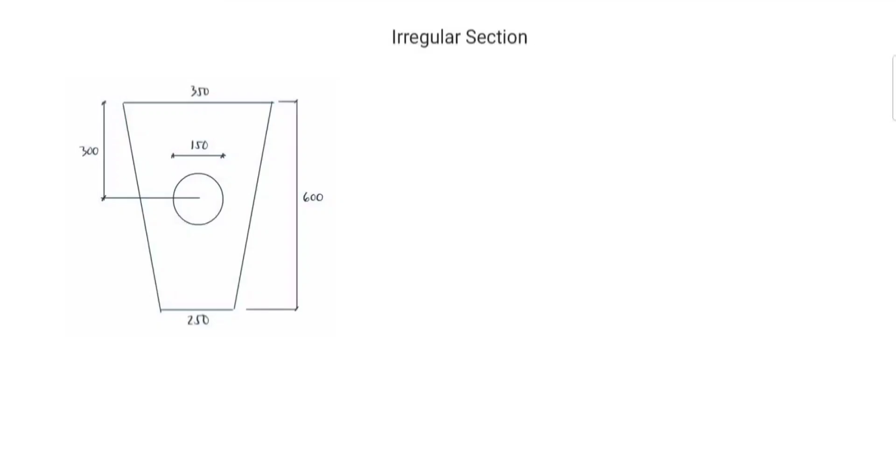Moment of inertia of an area. The example is an irregular section.

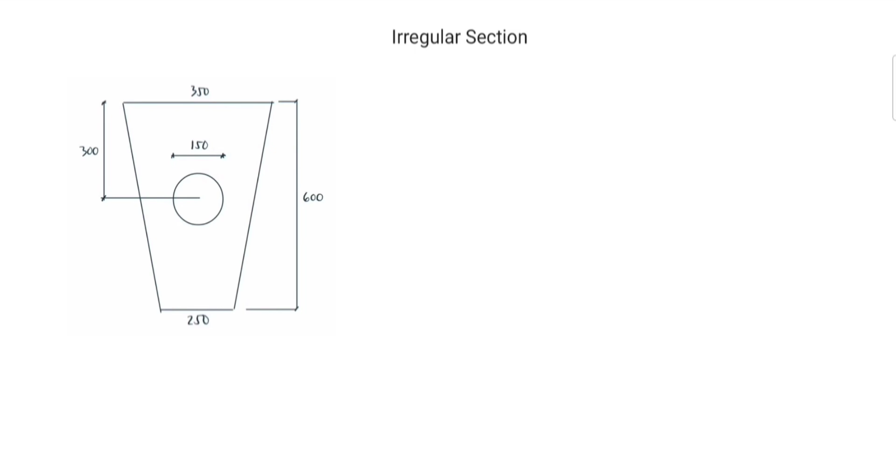Ang cross-section ay trapezoidal section na mayroong circular hole. Ang una muna natin gagawin is find the area. To find the area, i-divide natin yung cross-section into parts.

Yung trapezoid ay dinivide into two triangles. So the upper triangle is first part, the lower triangle is the second part, and yung circle is the third part.

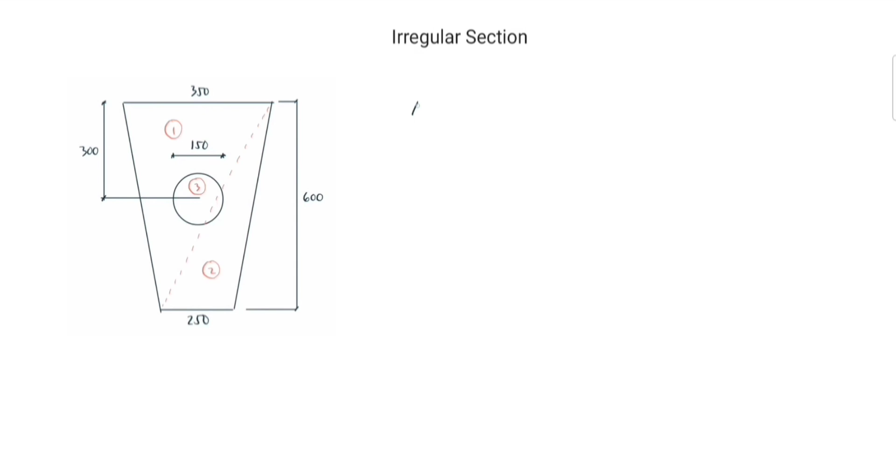Area 1 is equal to 1/2. The base is 350. The height is 600. Equal to 105,000.

Area 2 is equal to 1/2. The base is 250. The height is 600. Equal to 75,000.

Area 3 is equal to pi times the radius is 75 and then square. Equal to 5,625 pi.

So the area of the cross section is equal to area 1 plus area 2 minus area 3. Equal to 162,328.5413.

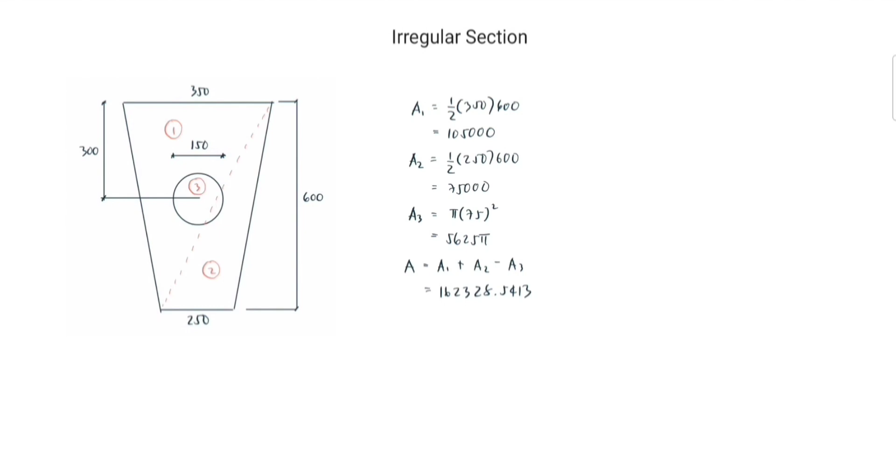Next step is solve for the centroid. Say ito yung centroid and yung distance niya from the bottom is YB. To solve for YB, we take moment of area about the bottom.

The moment of the total area about the bottom is 162,328.54 YB equal to the moment of the component areas about the bottom. For area 1, the moment of area is 105,000 times the distance of its centroid from the bottom equal to 2/3 of 600.

Plus, for area 2, the moment of area is 75,000 times the distance of its centroid from the bottom equal to 1/3 of 600. Then minus, para sa third part, the moment of area is 5,625 pi times the distance of its centroid from the bottom equal to 300.

So YB is equal to 318.4810384.

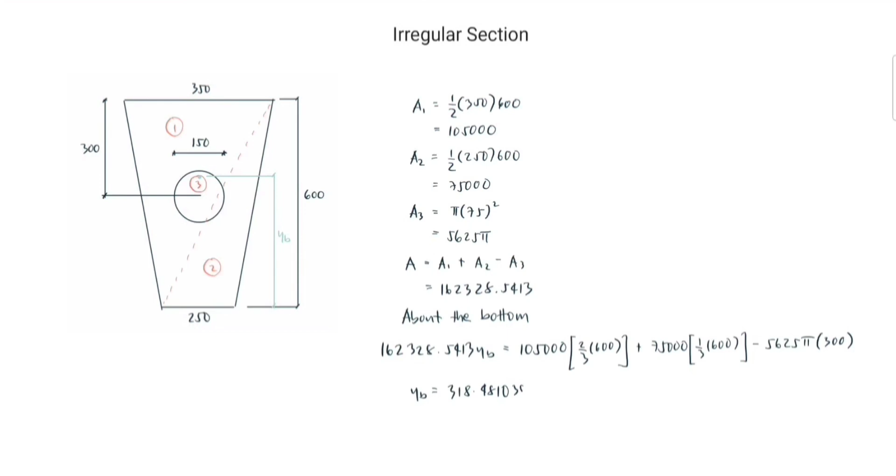Next step is solve for the moment of inertia about the centroid. Kung gagawa tayo ng cutting plane passing through the centroidal axis, medyo magiging mahirap ang calculation ng moment of inertia about this axis. So ang gagawin natin, maghahanap tayo ng axis kung saan madaling mag-solve ng moment of inertia.

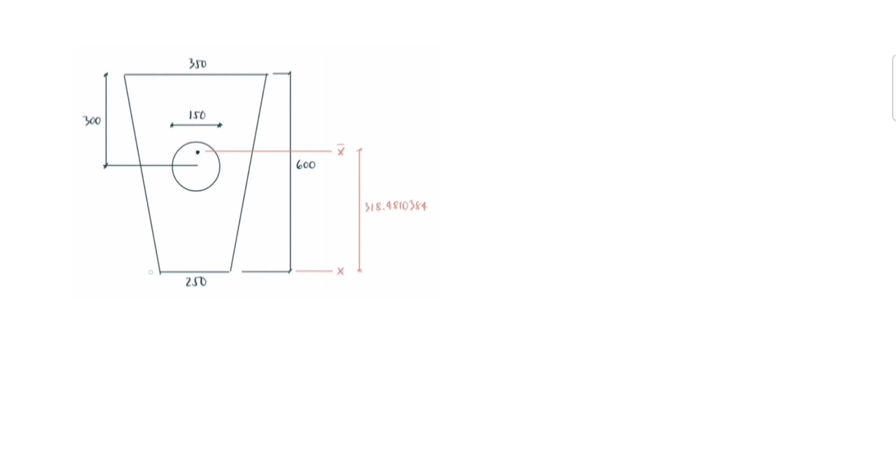Sa problem na to, madaling mag-solve ng moment of inertia about the bottom at tawagin natin siyang x-axis. So the moment of inertia of the cross-section about the x-axis is equal to,

para sa first part, the moment of inertia of the triangle about the x-axis, which is the tip, is equal to 1/4 times the base is 350 times the height is 600, then cube, plus, para naman sa second part, the

moment of inertia of the triangle about the x-axis, which is the base, is equal to 1/12 times the base is 250 times the height is 600, then cube.

Then para sa third part is minus the inertia of the circle about the x-axis. The inertia of the circle about its centroidal axis is pi, radius is 75 raised to 4/4, and then i-transfer papunta sa x-axis. So plus area distance square.

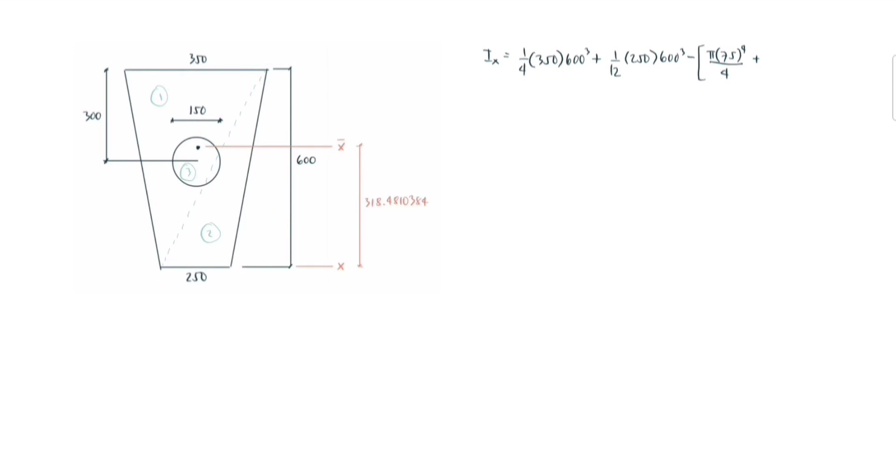The area is pi r square times the distance from the centroid of the circle to the x-axis is 300 and then square.

So Ix is equal to 2.178471823 times 10 raised to 10.

Then apply the parallel axis theorem. Ix is equal to Ix bar plus area distance square.

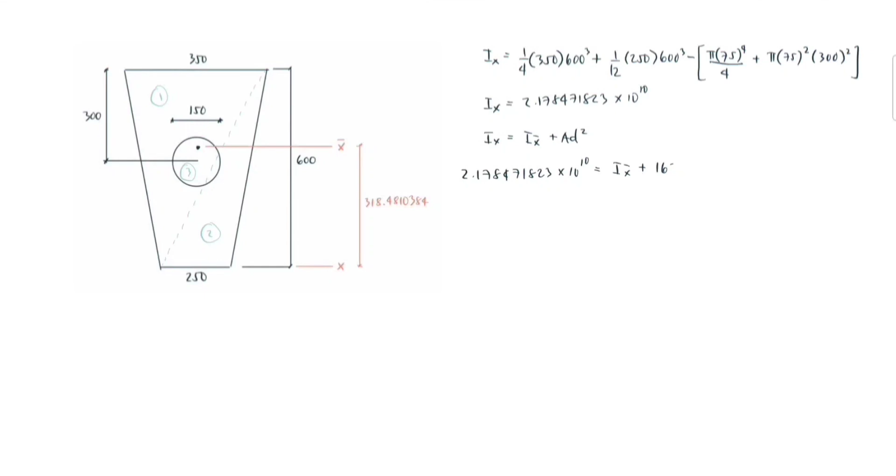Ix is 2.178471823 times 10 raised to 10 equal to Ix bar is unknown plus the area is 162,328.5413 times the distance between the x bar and the x-axis equal to 318.4810384 and then square. So Ix bar is equal to